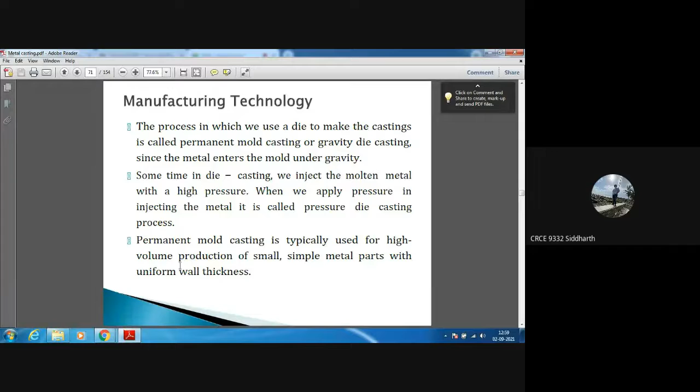Yeah. I am audible, no? Sir, I have to increase your volume specifically, but yes, somewhat audible. Somewhat audible, sir. What I will do, I'll just go to some other place and let me see the difference. Just hold on for 2 minutes. Is there any improvement? This is the maximum improvement. Here.

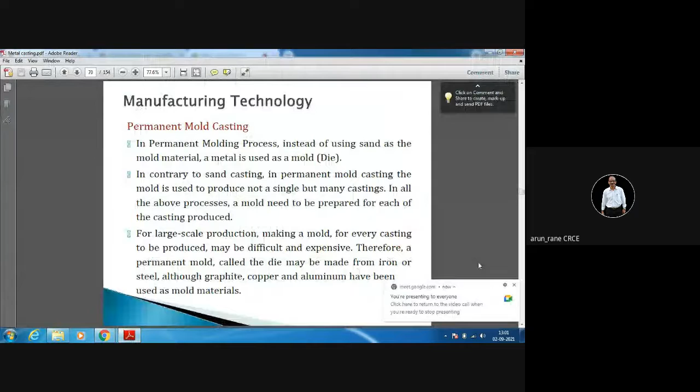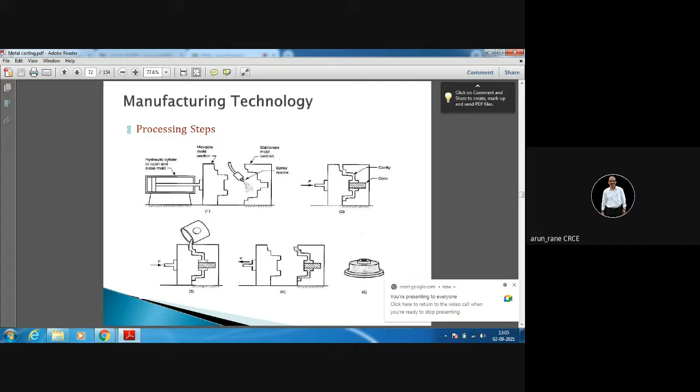Very good. And how many halves are there? Two, sir? Yeah. One is called as the fixed half and another is called as the moving half. Okay. Shall I go to the next slide? Any doubt here? No sir. Please be interactive. So these are the steps.

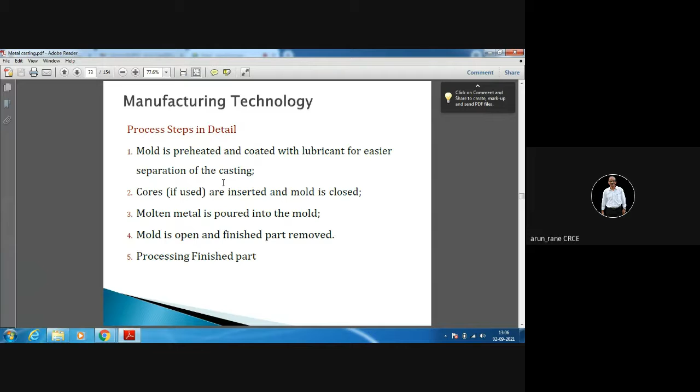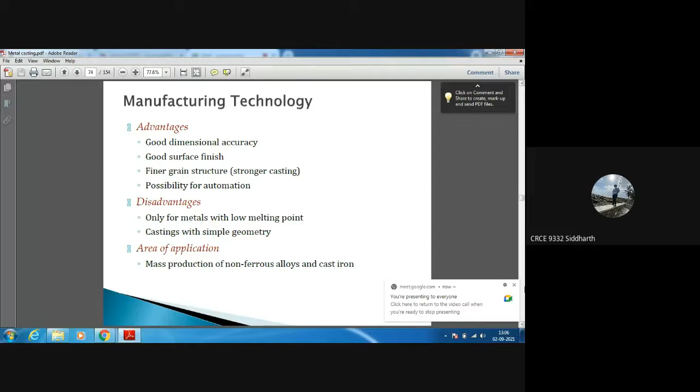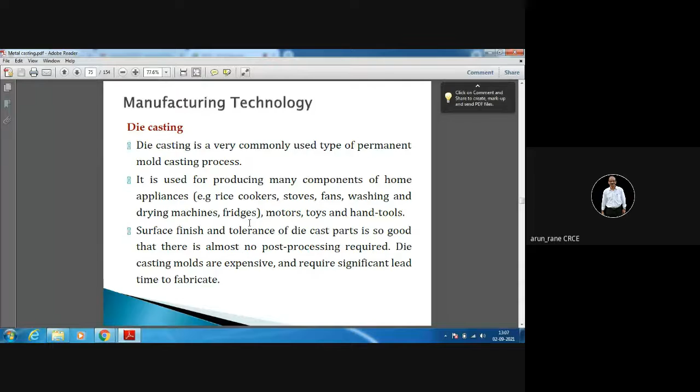Mold is made up of metal, it is not made up of ceramics or higher melting point alloy. So it would melt. Yes sir. Then the die casting. Die casting is generally used for aluminium and magnesium. That is rice cookers, stoves, fans, washing and drying machines, fridges. Why aluminium and magnesium? Because those are low melting point alloys.

And there are two types of die casting. One is hot chamber die casting and another is cold chamber die casting.

So in hot chamber die casting, the container in which the metal is melted is an integral part of the machine itself. That is, in the machine there is a chamber in which the metal is melted. And in cold chamber die casting, the metal is melted outside the machine, and from that point the metal is carried into the machine. So that's why it is called the cold chamber machine.

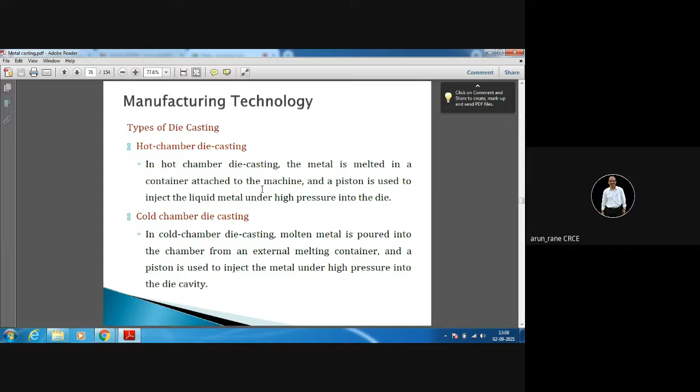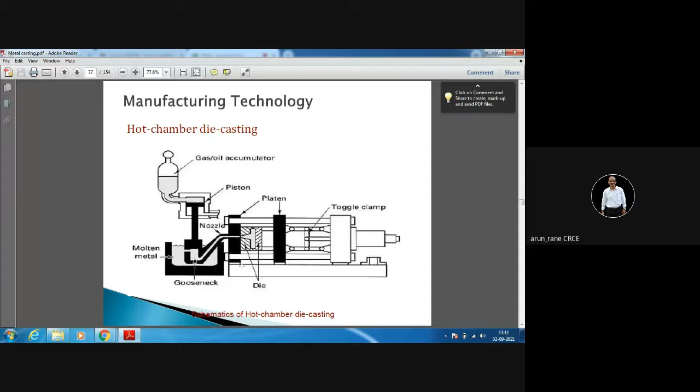The disadvantage is that it is applicable only for simple shapes, but nowadays die casting technology has improved a lot, and even intricate shapes can be generated. Majorly we do aluminium, and that's why it is also called aluminium die casting.

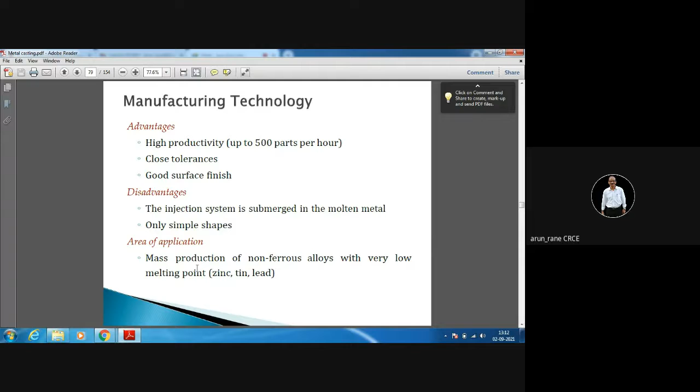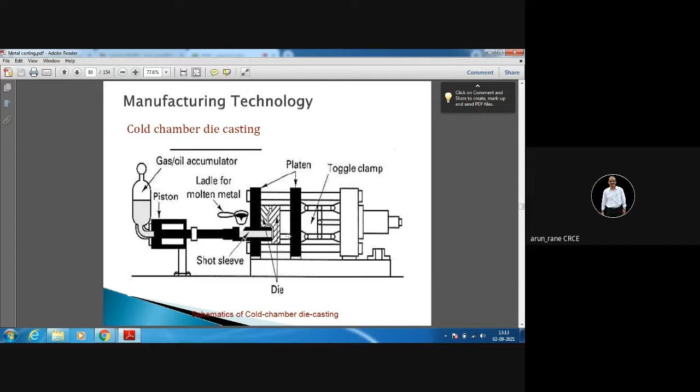So this is your injection pressure, and the clamping pressure has to be more than the injection pressure. Hydraulic clamping is used very often. So this is the procedure for the cold chamber process.

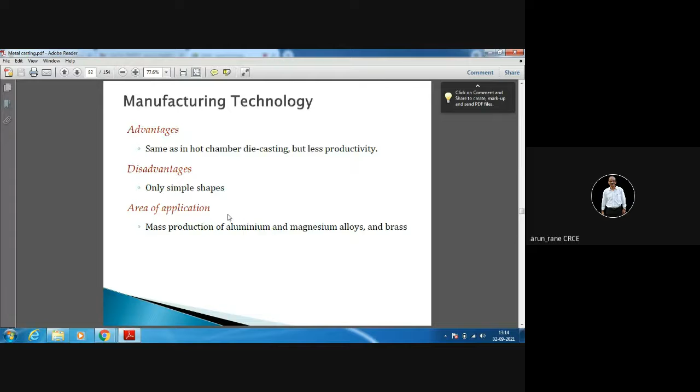Are you there with me? Yeah, sir. Centrifugal casting, right? Yeah. Which pressure has to be more, clamping pressure or injection pressure? Centrifugal has to be more if we have to create a hollow cast, right, sir? No, no, no. I am talking about die casting. In die casting, we saw one is clamping pressure and another is injection pressure. So which has to be more?

Sir, if we want a smoother finish, then locking pressure, right, sir? Locking. Why should locking pressure be more than the injection pressure? Anyone can answer. Sir, we'll get a smoother mold, smoother product. No, no, no. Anybody else? Sandra, are you there?

What I was asking is why the clamping pressure should be more than the injection pressure in case of die casting. There are two pressures, isn't it? One is clamping pressure and another is injection pressure. So my question was why clamping pressure should be more than the injection pressure.

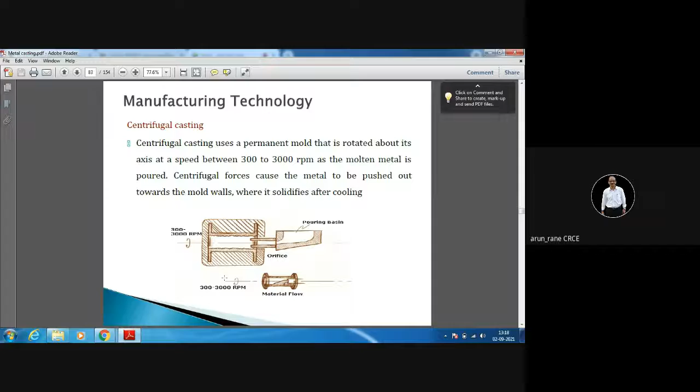In this, the metal is forced centrifugally out. So this is the mold, this is the pouring basin through which molten metal is coming. It is rotated so that molten metal is thrown due to the action of centrifugal force, and then it is allowed to cool so that it is solidified. Generally it is used for hollow pipes, hollow tanks, hollow round components, not square components.

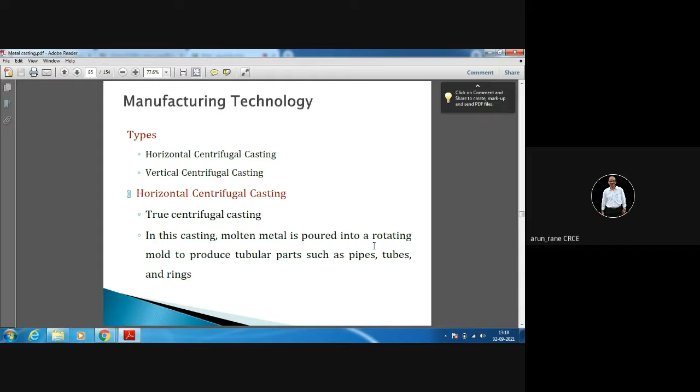Centrifugal casting is divided into two parts. This is horizontal centrifugal casting, which is also called true centrifugal casting. Here the molten metal is poured into a rotating mold, the mold is rotating, in order to produce parts like pipes, tubes, rings. This is your horizontal centrifugal casting.

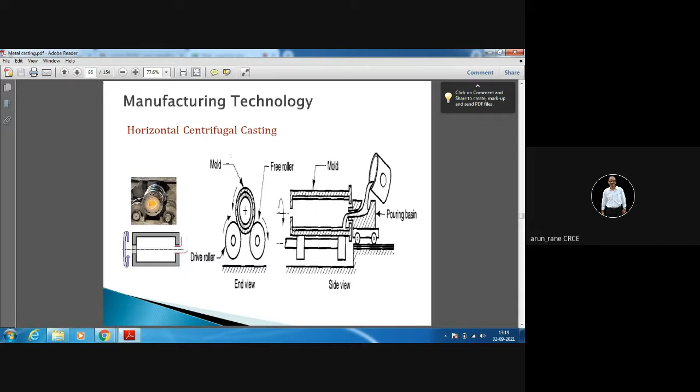Sir, they put belts on drive rollers, so that is how the mold is rotated, right? Yeah, drive rollers are rotating, and because these drive rollers are rotating, your mold will also rotate. Then your molten metal will get stuck on the walls of the mold, and then it is allowed to cool. Okay, good.

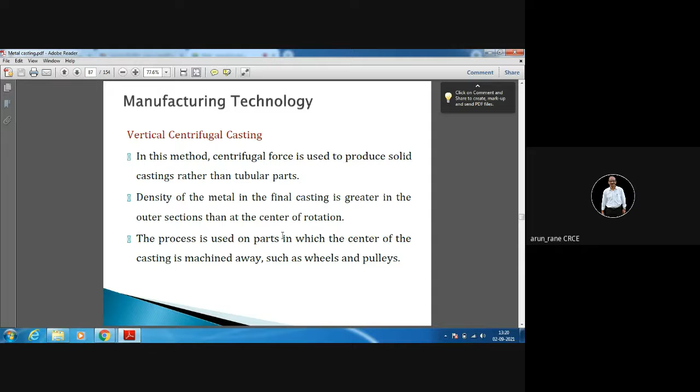So in case of horizontal centrifugal casting, the mold is rotating, whereas in case of vertical centrifugal casting, the mold is stationary. Due to the centrifugal action, the centrifugal force is used to throw the material away from the center onto the walls of the mold. This is your vertical centrifugal casting, where the molten metal is thrown.

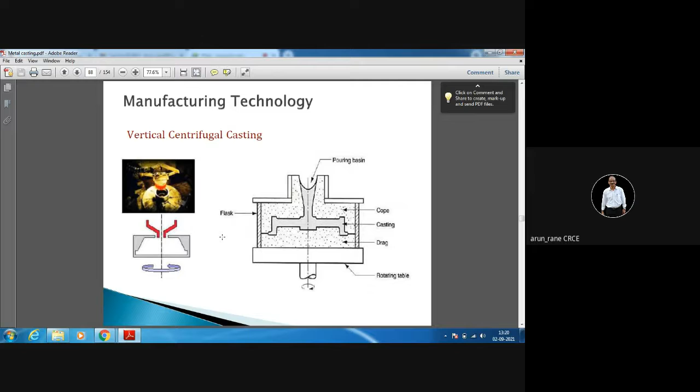Generally, horizontal centrifugal casting is preferred. So this is horizontal and this is vertical.

In horizontal centrifugal casting, the mold is rotating, and in vertical centrifugal casting, the molten metal is thrown with the help of centrifugal force. So there is some arrangement with which the molten metal can be thrown outward. Are these two diagrams clear?

Can you explain the second one, vertical centrifugal casting? In centrifugal motion, the molten metal is thrown outwards. You know your washing machine, when you stop it, what do you observe? Your clothes are sticking to the tub because they have been thrown outwards.

We also learned in 12th standard about the centrifuge, which is used for removing impurities from a blood sample. How are the impurities removed? Because they are heavy, they are thrown outwards.

Similarly here, the molten metal is poured onto a rotating disc. The molten metal from the ladle is passed through this disc, and since the disc is rotating, the molten metal coming out is thrown onto the walls of the mold because of the centrifugal action. Is it clear? Yes sir, understood.

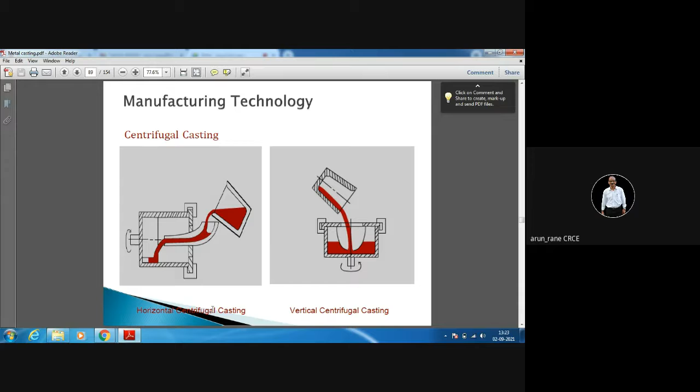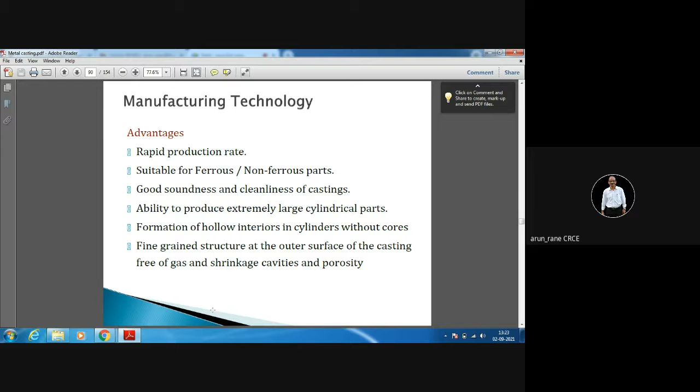Yes sir, understood. So you can go through this textual explanation, because I'll be uploading the advantages etc. that I explained now.

Then there are disadvantages like contamination of the internal surface of the castings with non-metallic inclusions - this is the biggest disadvantage. Sometimes the diameter is not concentric and not round. The diameter of the mold is not perfectly round, but that doesn't matter even if it is slightly oblong, because the purpose is just to store the liquid, to store the water.

There is no relative movement - it is not going to fit inside any component, so even if the diameter is not perfectly round, it doesn't make any difference. Another bigger disadvantage is that if you want to make a square or rectangular tank, that is not possible with this centrifugal casting - it is only for round components.

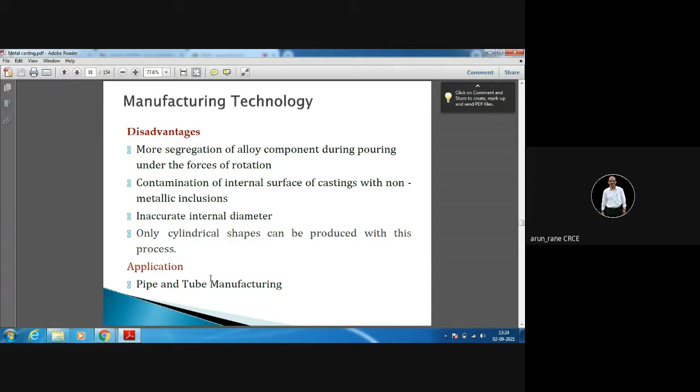Okay, so can anybody summarize what types of castings we have learned so far? Whatever you remember, you don't have to be scared. Wax casting, sand casting, vertical centrifuge, horizontal centrifuge, then...

Casting with permanent or one-time use molds - that is for the expendable mold and permanent mold.

Most important, today I taught you one - the nozzle one that you are talking about. I forgot the name, sorry - hot chamber die casting and cold chamber die casting.

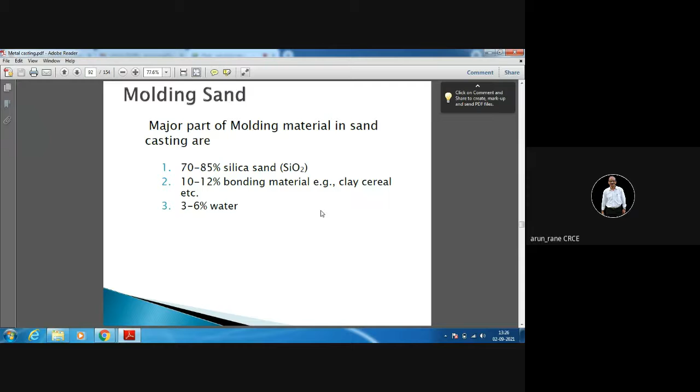So the major part of the molding material in sand casting is this silicon dioxide, then there is the bonding material which holds the sand particles together, and some percentage of water.

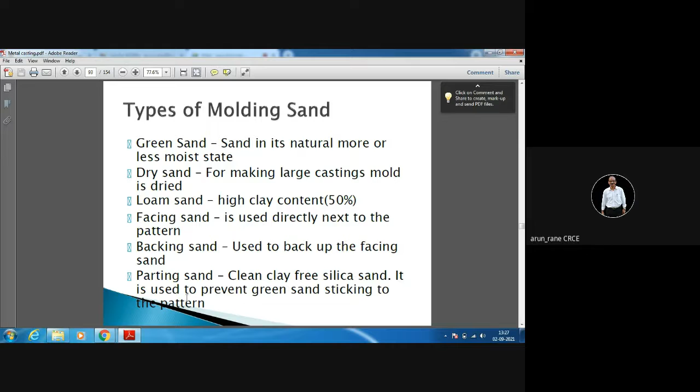What are the ingredients of the molding sand? The ingredients are grains plus binder plus water, and plus we are adding some additives.

There is something called the refractoriness of sand. The purpose of refractoriness is to withstand the temperature.

Alumina, that is Al2O3, that is the best. So refractory sand is made up of silica sand that is SiO2, alumina that is Al2O3, and magnesium oxide that is MgO.

So it provides refractoriness. Refractoriness means heat resistance, resistance to heat. Chemical resistivity and permeability. Permeability means if there are any gases, then that gas should come out. So it should be slightly porous also. It should be porous enough to allow the gas, but not so porous that the molten metal also oozes out. Understand?

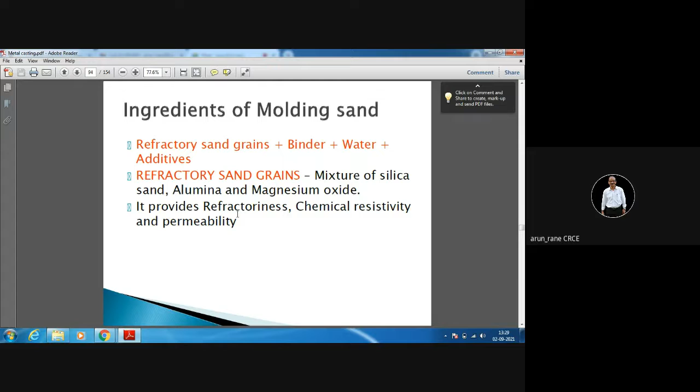It is like when we say, oh there's gas in the stomach, so how uncomfortable you feel. Same thing, if the gas is not removed, then it is dangerous to the product, it is dangerous to the customers.

Binders provide the necessary binding strength, and the function of the water is to develop necessary plasticity, that is the sand should flow also.

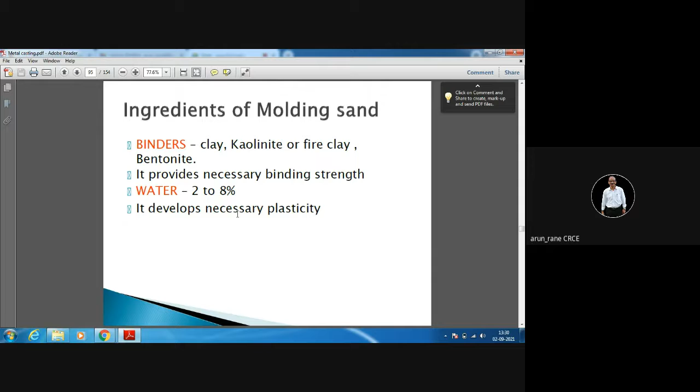What are the different types of additives we are using? Using coal dust, and every additive has its own function. Like coal dust is used for protecting the mold surface against the action of the molten metal.

So the mold surface is protected. It also gives a true surface finish.

Then there is something chemical which is called dextrin. That is used for increasing the toughness and collapsibility, increasing the toughness of the mold.

When you have iron oxide powder, which is used for hot strength, and anti-metal penetration powder. Then molasses. Molasses is nothing but your dry strength and high collapsibility. That is called molasses.

So high molasses powder, what does that mean? It has got good dry strength and high collapsibility.

Refractory means, as the word indicates, high temperature resistance. Strength means it should retain the shape of the mold. The pattern shape we put in the mold should not collapse until your product is solidified and cool.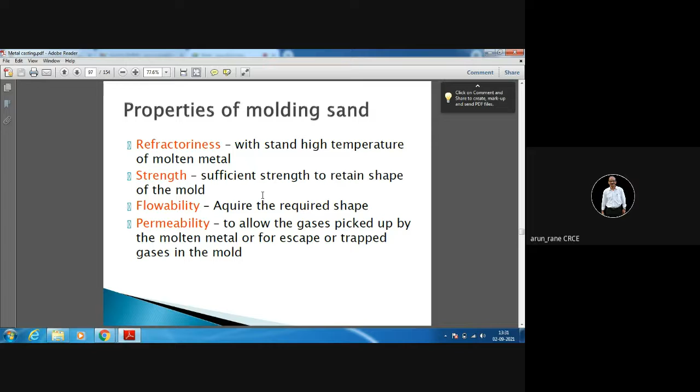Then flowability: if the sand is flowable, then only it can acquire the shape of the pattern. And permeability, as I told, allows the gases to flow outside. This permeability is also called venting. Venting is nothing but the gas being allowed to go out.

These are again some important properties: cohesiveness and adhesiveness. You know in 12th standard physics you learned what is cohesive and what is adhesive. Cohesiveness means within.

Suppose if I have a liquid, then within the liquid itself there is cohesiveness. And if that liquid is kept in a solid glass, then the bonding between the solid glass surface and the liquid is called adhesiveness. Cohesiveness is the ability of sand grains to adhere to each other, and adhesiveness is the ability to adhere to the walls of the molding sand.

Then collapsibility means that after solidification the sand should collapse also.

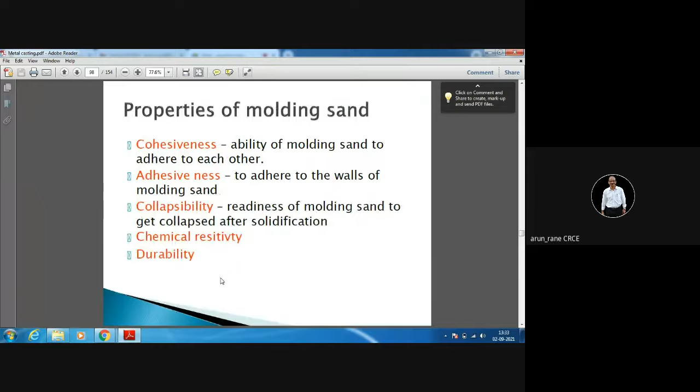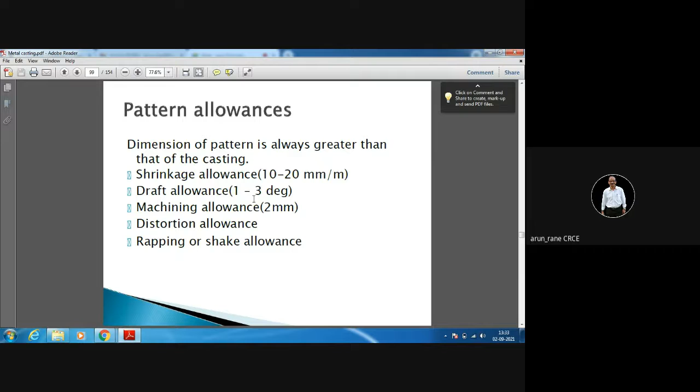And then this pattern allowances we have covered up, I just flipped through it very fast. That is shrinkage allowance, draft allowance, machining allowance, and draft allowance is 1 to 3 degrees so that your component can be removed easily, your product can be removed easily.

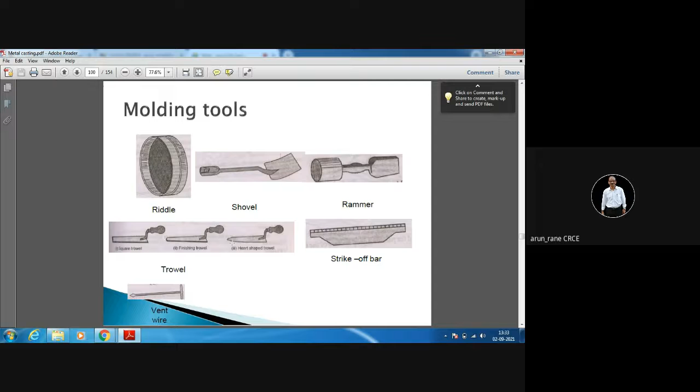And these are the mold tools, so that we'll discuss later. If you have any doubts, you can please ask.